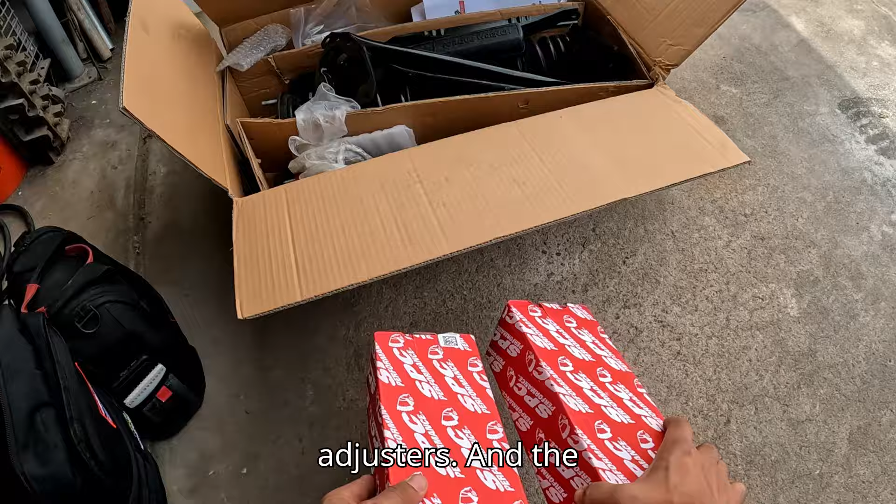Alright guys, I got the front adjusted. There might be one final adjustment to go up a little more, but I'm going small little bits at a time. We got the SPC camber adjusters, and the rear are coilovers.

So first things first, let's get these lug nuts broke loose before we jack it up, and then we'll put it on jack stands. Alright, just gonna loosen these up and then finish jacking it up. Then we can get started.

Alright, so we gotta pull all this shit out, and the reason why is so that we can pull the inner panels inwards so that we can expose the bolts to the inside of the struts. So I'm just gonna take this shit out. Take this stuff out.

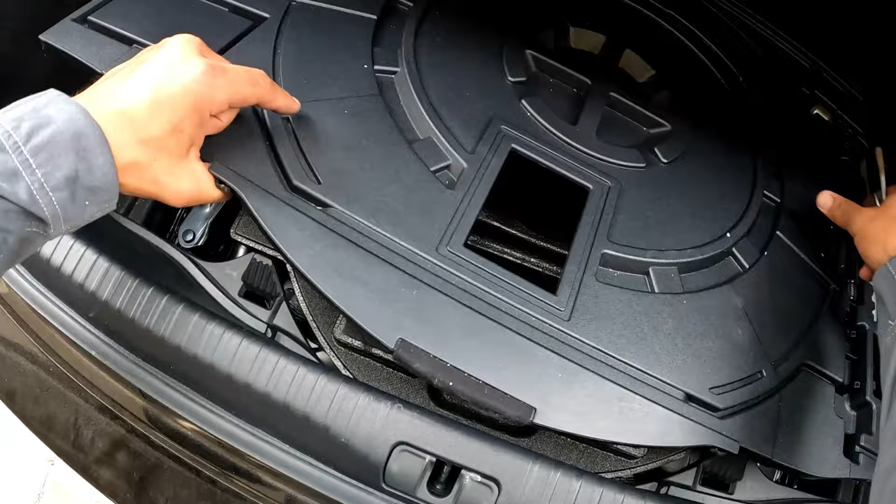So I'll show you guys how I use it. So use a little Lexus tool, and then you use the back of another one for the leverage. See that? Of course it would fall in here. Maybe I should take this whole thing out, because I'm going to drop more shit in there.

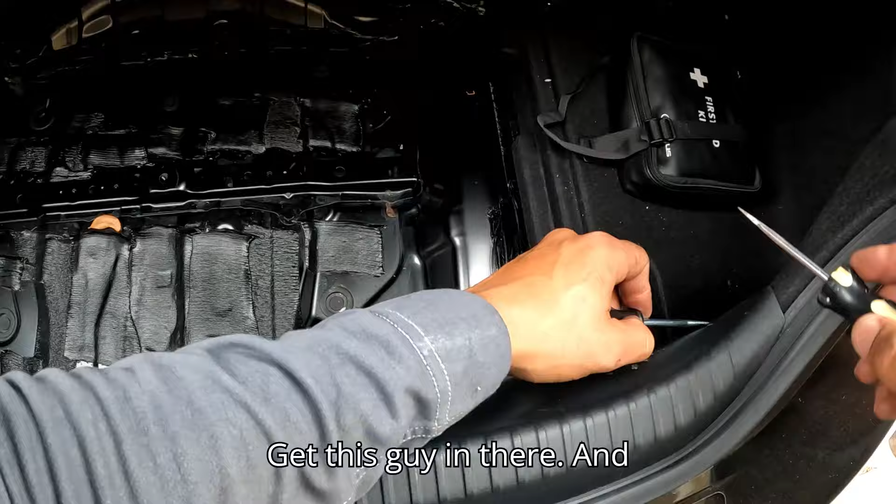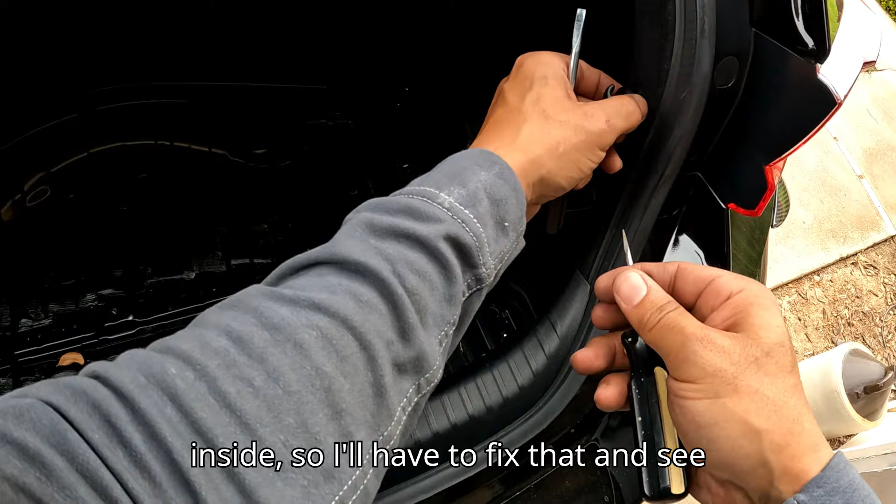So, same thing again. Get this guy in there, and then use this for leverage. There we go. This one spins out. Come on. The back of this feels like it's gonna fall off inside, so I'll have to fix that and see what it is. Yeah, look at that. Alright, this you're gonna pull upwards. Yes.

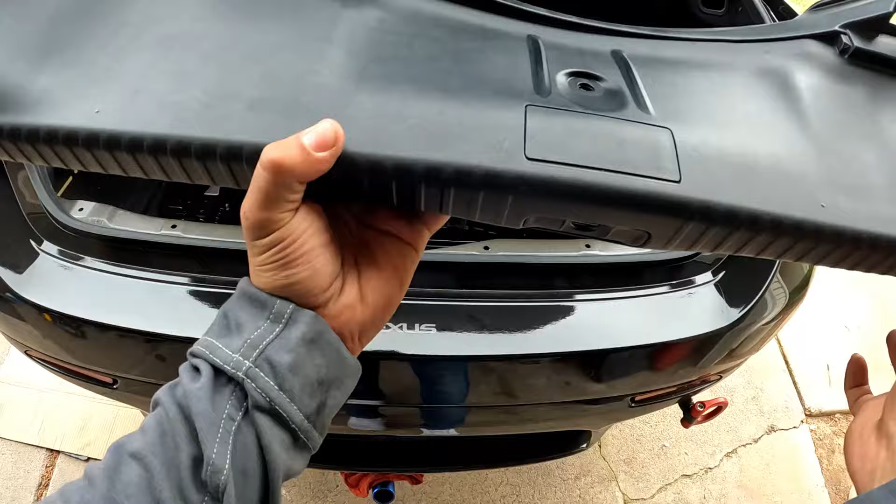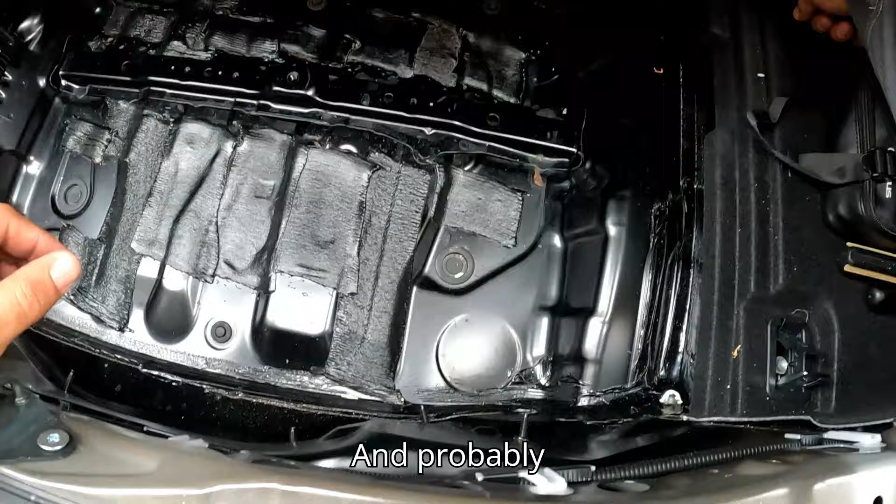Alright, let's see, what else do we have? Looks like there's a bolt right here. Yep. Looks like a 10mm. Another 10mm. Alright, so let's take those off. And probably here too. Yep, 4 bolts.

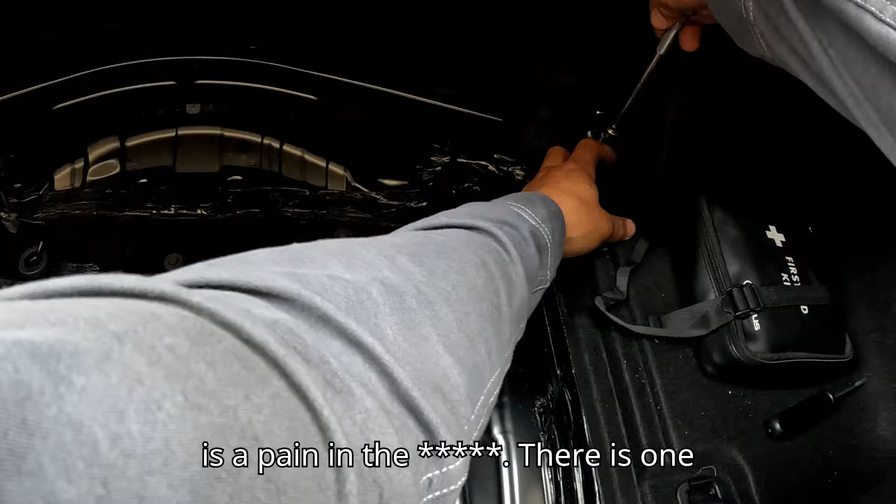So even though recording is a pain in the ass, there is one benefit to it. If I forget how something goes back, I can always look at the video. Alright, these I'm just going to leave here, and I'm going to leave them in the position they came out.

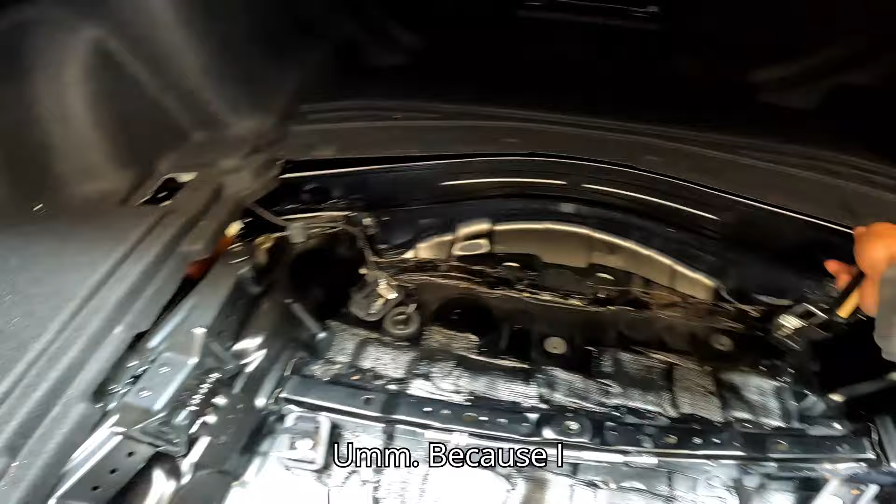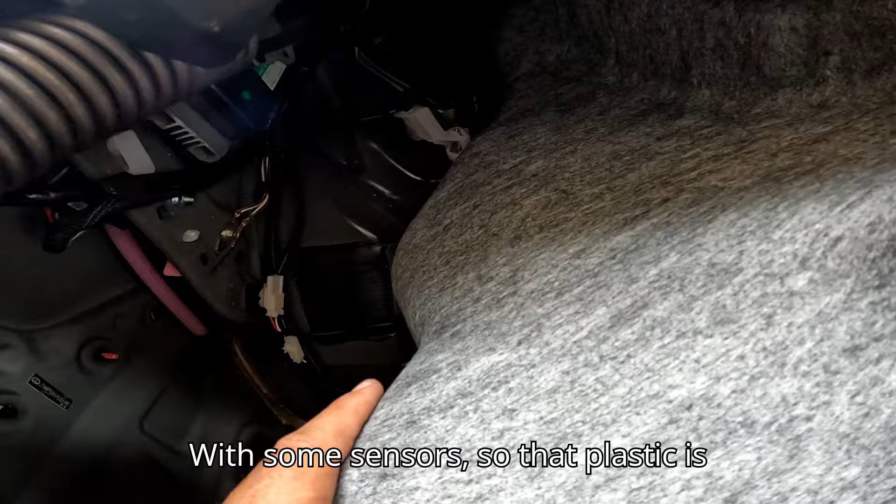So, alright, so I did take these off because I was pulling this side in and it was kind of in the way, so I just kind of want to do this. Close this guy. Do this, and then now that I have this top side loose, I can pull this out. And there's our shock, back there with some sensors. So that plastic's gonna be a spare part, yes.

All right, so now that the inner liner is exposed and we can get to the top of this, we're gonna need a 10mm to remove this. This is not the brake line, this is the ABS, I believe. So we're removing that. We're gonna need a 7/8 for that big bolt on the back, and you're gonna need a wrench for that. It's really hard to fit a socket because everything's in the way. It might actually be easier to remove that after you get the springs out.

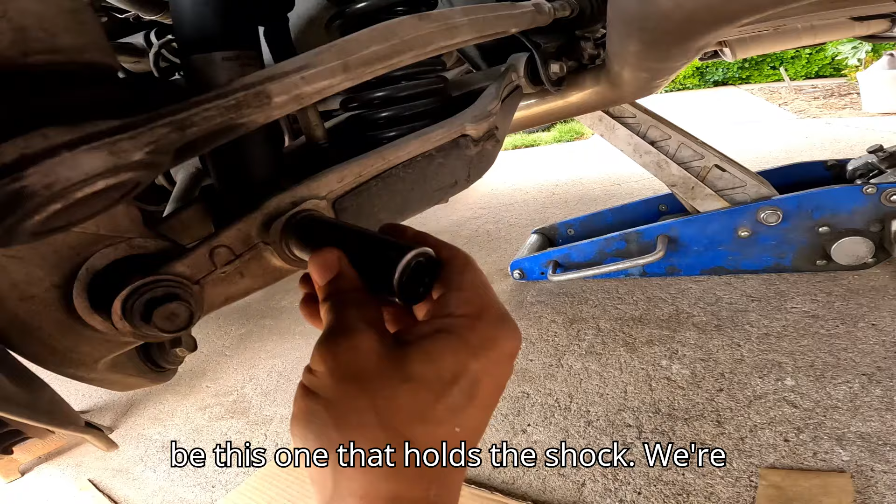So right now we have a 3/4 for these bottom bolts. So it's going to be this one that holds the shock. We're going to loosen that one but not take it off, and we're removing this bottom one as well. We're going to put a jack underneath. We're removing the sway link. That is going to be a 14 on the bottom right here, and that'll let us pop it off.

Jack on the bottom to hold it from springing out when we take the bolts off, and then we'll lower the jack, get the spring out. The shock will be left dangling, and then we'll remove that from the top, and we'll do this last once we have more room to work in there. So now I'm gonna mount the camera back on me so I can use my hands.

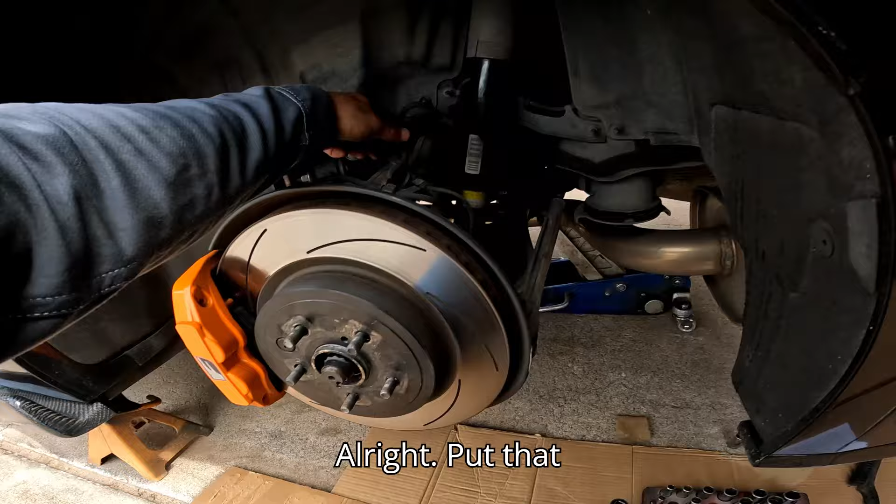All right, put that there. So ABS is loose. Now we're gonna do the link. Fucking working one-handed. Lefty. All right, time for a jack. All right, there's the shock bolt.

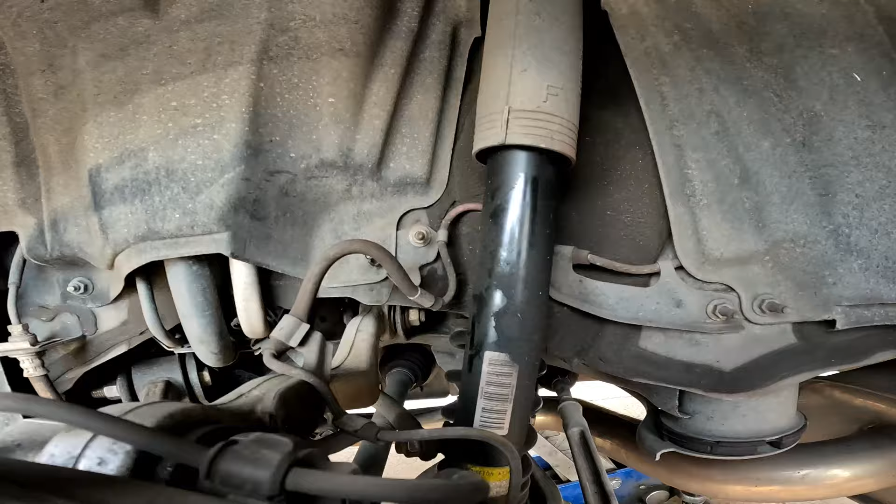Alright, I lied. It's not a 7/8 for that back one, so let's figure that out. I'll loosen that back bolt. Before I do that, I'm just gonna go ahead and lower this, see if I can get the spring out. Something's catching. What is it? It's not that. So shock's loose.

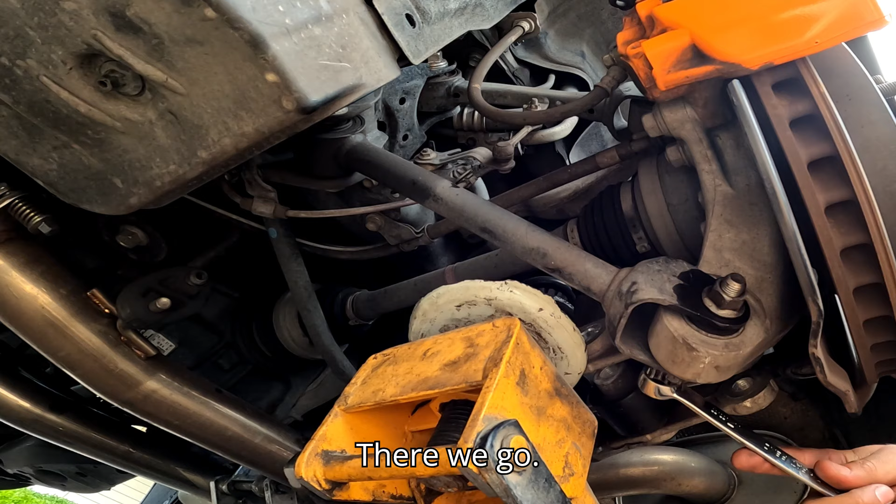Oh, I see. It's this piece, motherfucker. Come on. Just get in there. Oh, I got it. There we go. So stupid.

So I can't get the lower control arm off without taking this bolt because it's in the way. So this link right here is just hitting the bolt, so bolt needs to come off. And if I remember correctly, when I did the lowering springs, this was a royal pain to line up. So looking forward to that. It's gonna be so fun. All right, come on. Alright, so I'm going to push that out and then we'll lower this and get the spring out.

Just in case you guys are wondering, 1.5 years. That's about how much you get from these shocks when you use the lowering springs. Both the rear ones are leaking. The fronts are still okay, but the rears are shot.

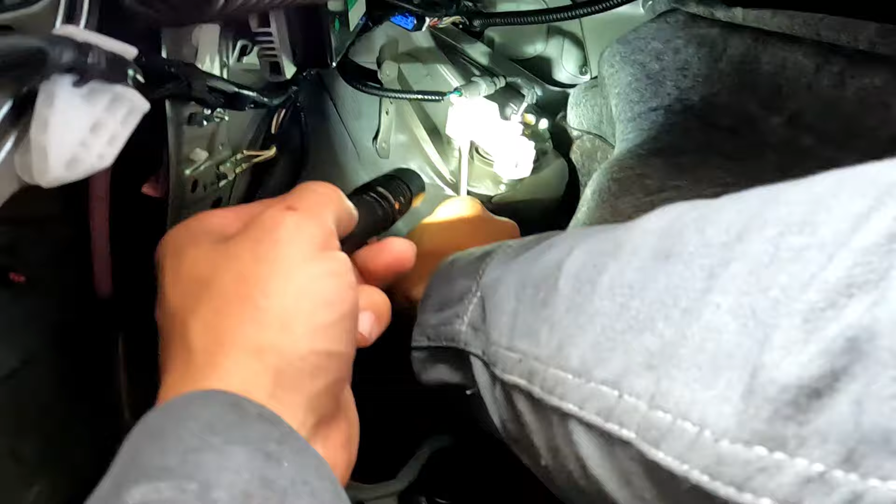Alright, there we go. There we go. Got this off. I'm just gonna take this plastic off completely. I don't want it back here. Spare part.

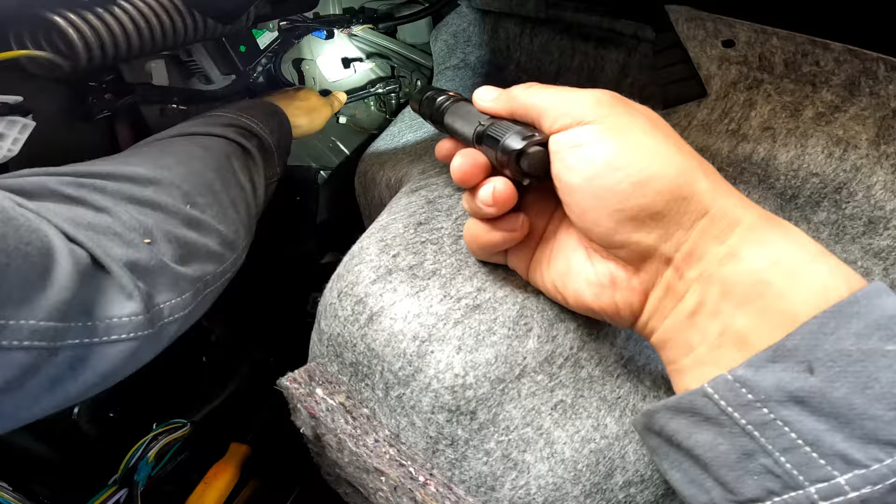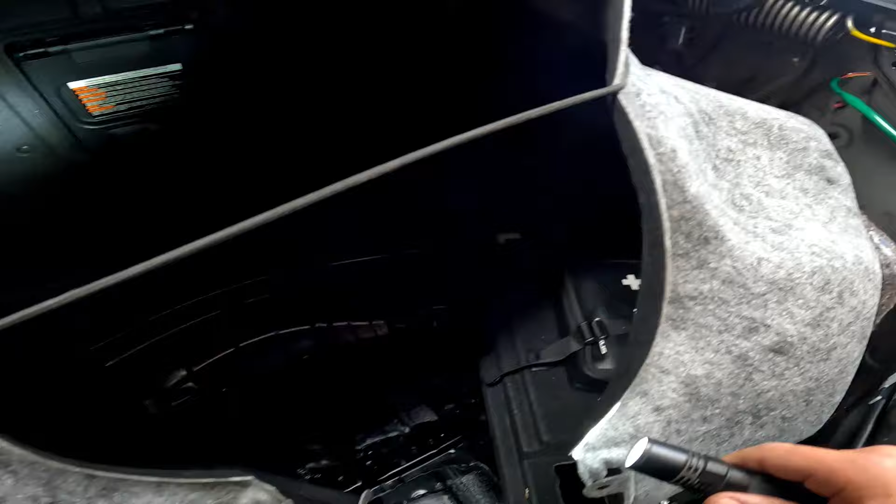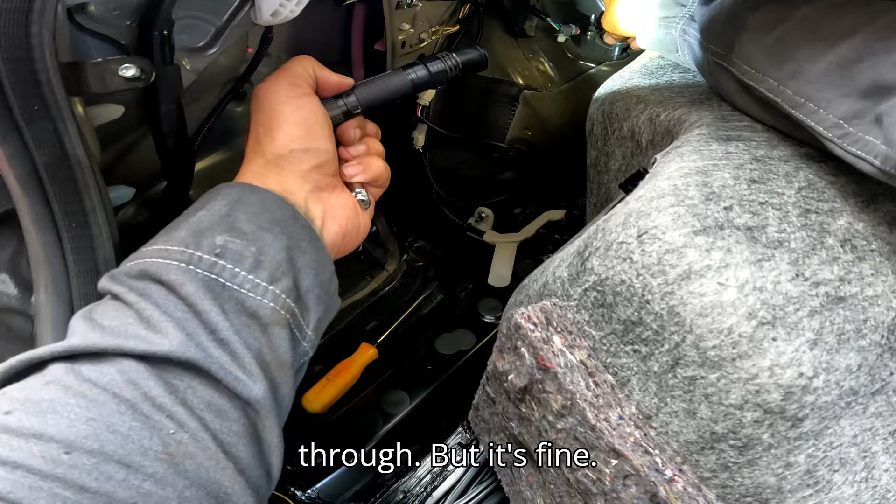Alright, so it looks like the top of the strut is a 14, just tight as hell. Jesus. One off. Yeah. Two. And what I did was I bungeed these together. There we go. Everything is loose down at the bottom, so the last bolt here is probably going to have tension all the way through, but it's fine. These shocks are trash anyway.

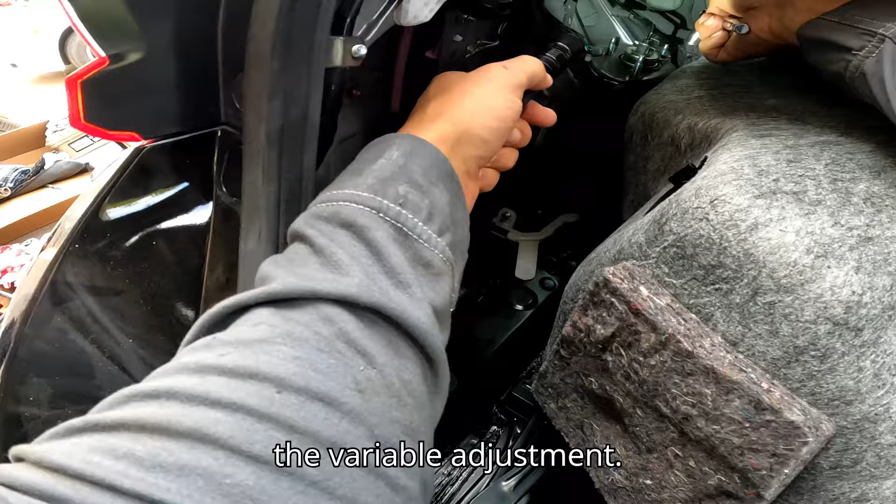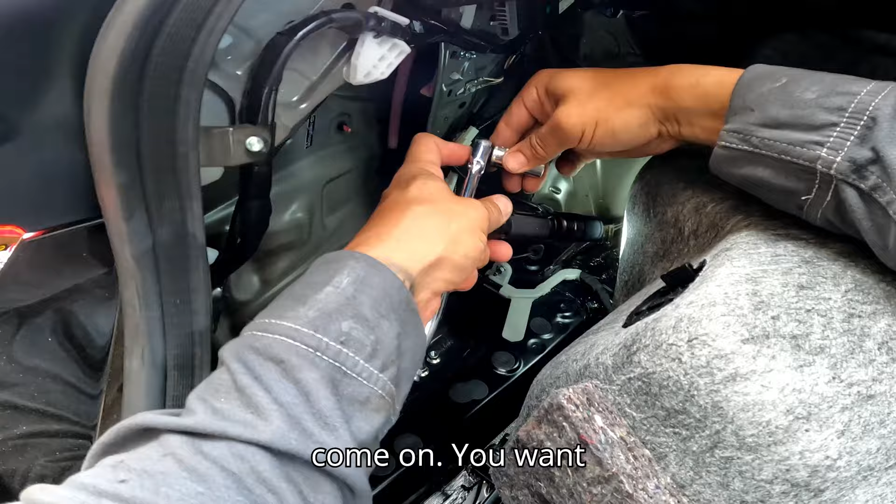If you guys are wondering if I like the ride of the Swift springs, I really did. It rode nice. It's a little too plush, even with the variable adjustment. But really what I'm looking for now is I'm chasing the perfect fitment. And I think you will eventually reach that point where you want your, oh my God, come on. You want your wheels to sit perfect, but also have that happy medium where your ride is not rubbing, but ooh, there we go.

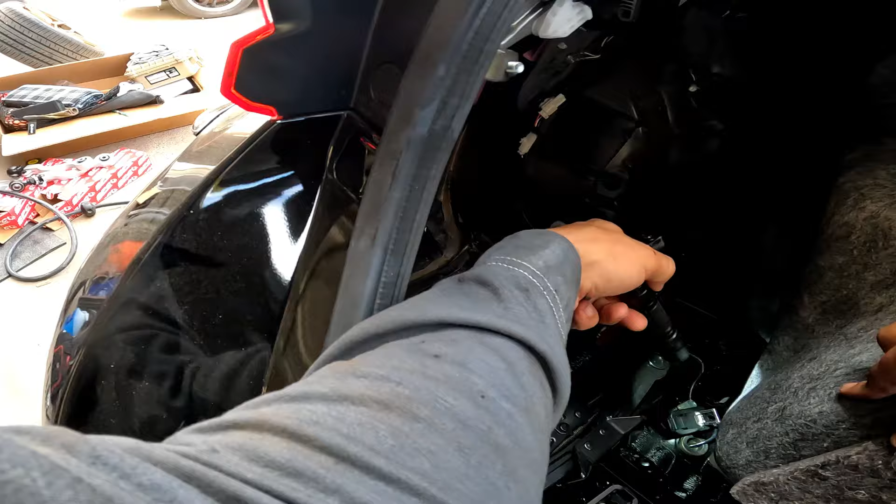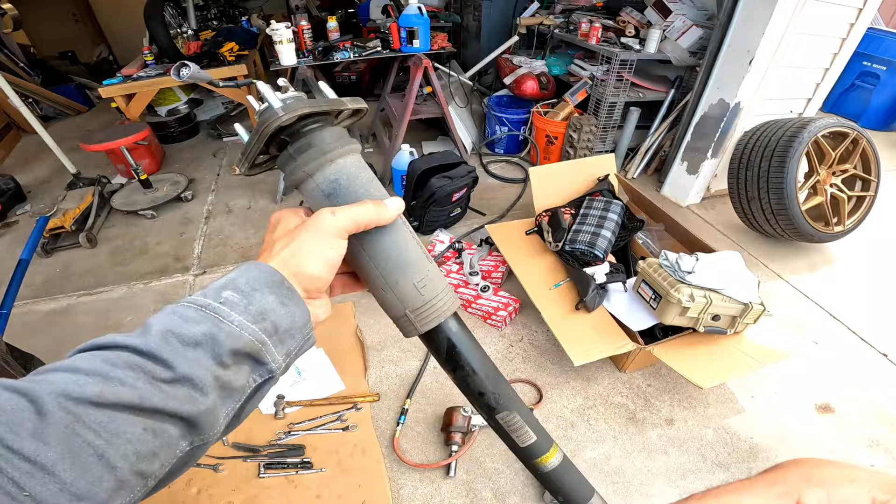These are about to drop. Yep, there it goes. Come on, where are you? Found you. Okay. All right. Look at that. It's the first time I see one of these out like that. The rears, that's a pretty long guy.

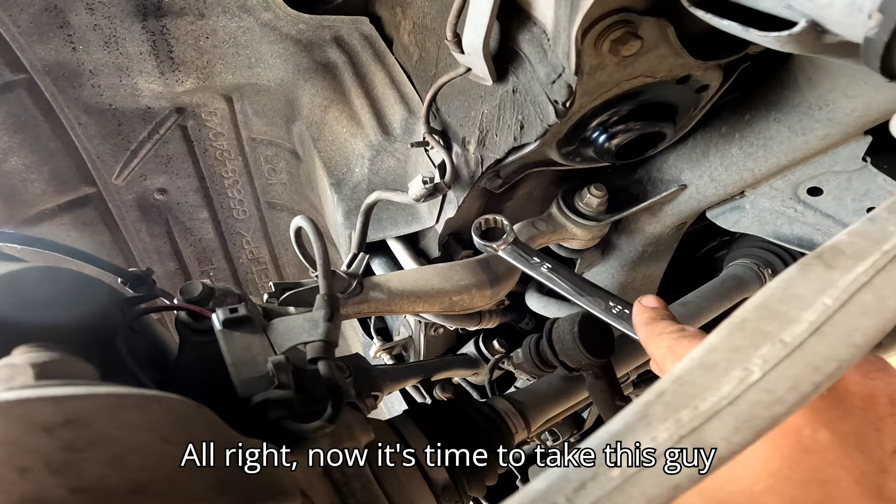Alright, now I have to deal with this bracket for the brake sensor. It's going to be in the way of the struts, so alright, now it's time to take this guy off. So we're going to use a 3/4 on this bolt here. And let's see. This one's kind of hard to get to too, so I had to use the 2-wrench method for leverage. All right, one guy, and now we're gonna do this bolt. Yes. All right, that is a 7/8.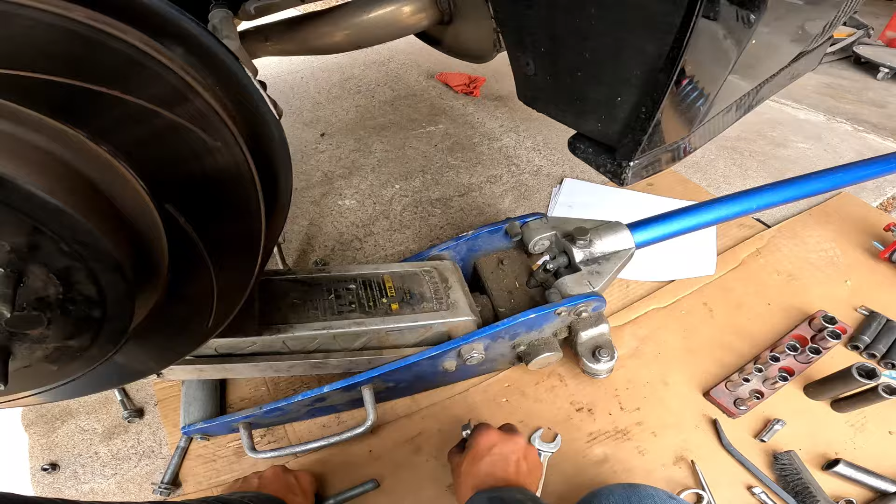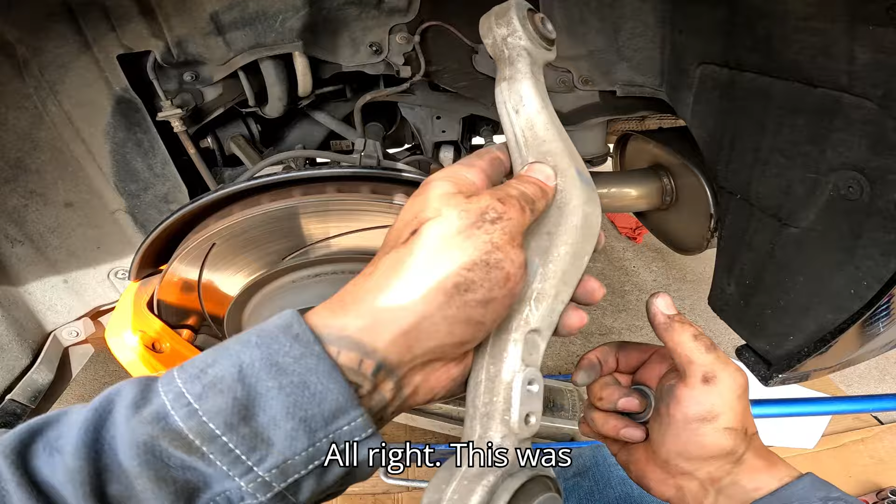There we go. There's a washer on there. Yeah, we got it. Alright, these go together. And now we are going to pry this off. Okay, so it's off. Take this washer. Alright, this was the hardest part, to be honest. I'm gonna leave this washer here.

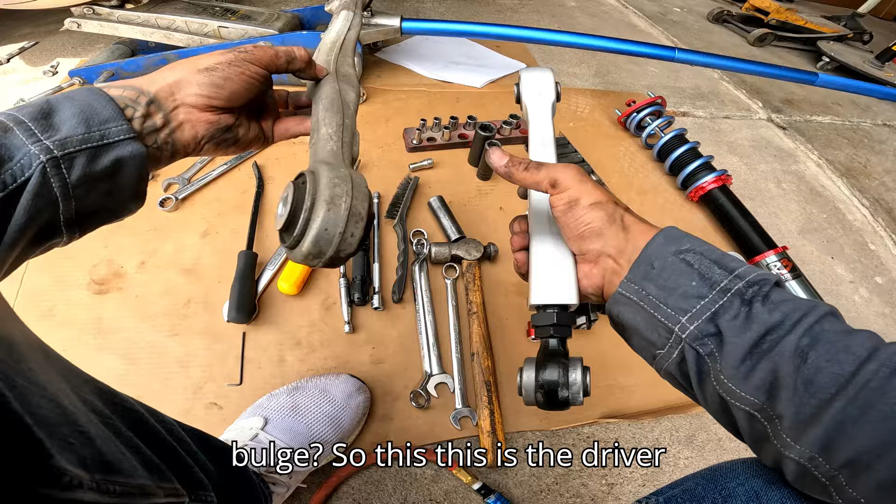Okay, as far as these go, they both look the same, to be honest. So see how this has a bulge? So this is the driver's side, left side. These two are identical, so there is no right or left on these. And what you would do, if I had to guess, is I think you just have to switch this to the other side for one side or the other.

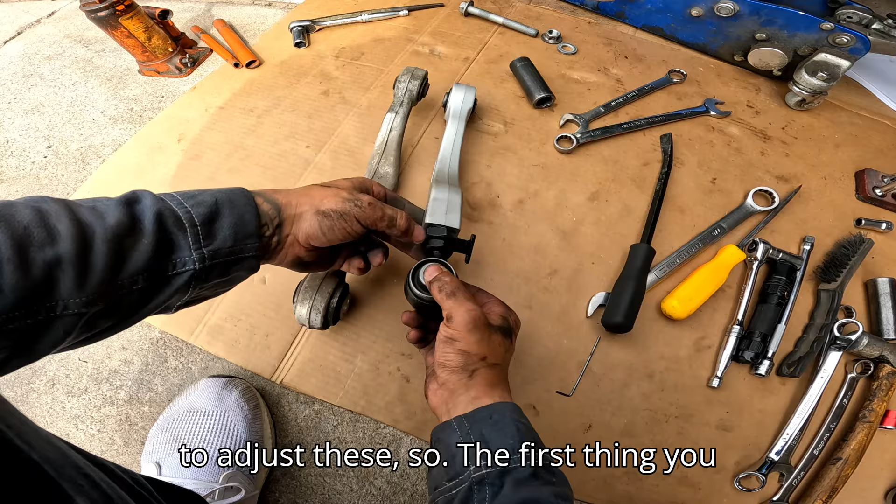Alright, I'm going to show you guys something. Alright, I'm going to show you guys how to adjust these. So the first thing you want to do is this nut right here. You got to get it all the way out to the outside. This is what they call the small jam nut, and the hex adjuster is this large one here. So what the instructions say is that both sections should be equal length.

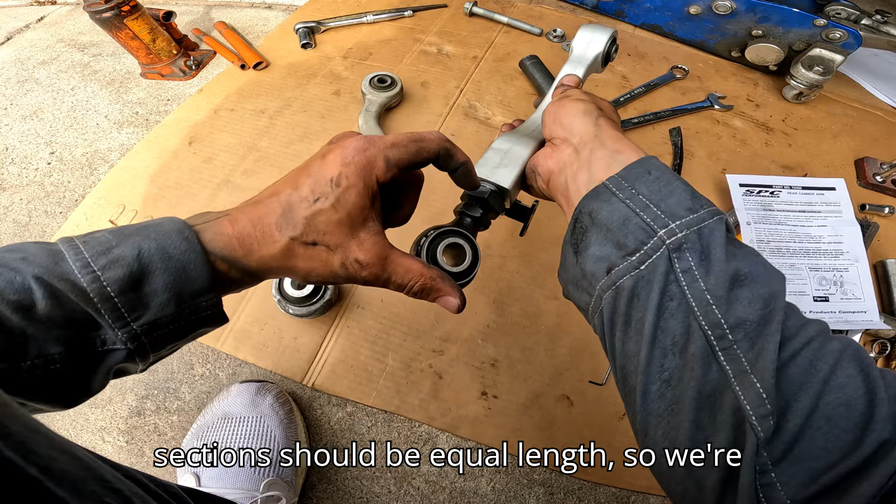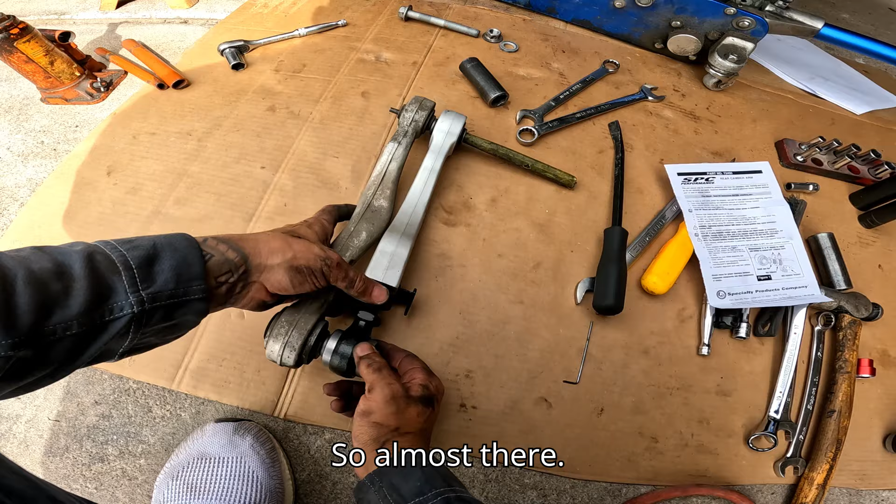So we're going to make this match this side, and if we want to get real picky, we can align them here perfect, right? And so the camber is just slightly off. I think I'm at like -1.2 camber. Oh, this is reverse thread, by the way. So we're gonna make the adjustment by moving both so that both are equal length right here. So this is reverse, this is not. So almost there. Okay, just a little bit more. I think that's pretty spot on, but just to make sure.

You know what I could do? It's this right here. There we go. Okay. That. Look at that. We're good. Okay. So, are these equal length? They're pretty close, I would say. They don't have to be perfect, but I think this needs to be out. And okay, that's pretty damn close.

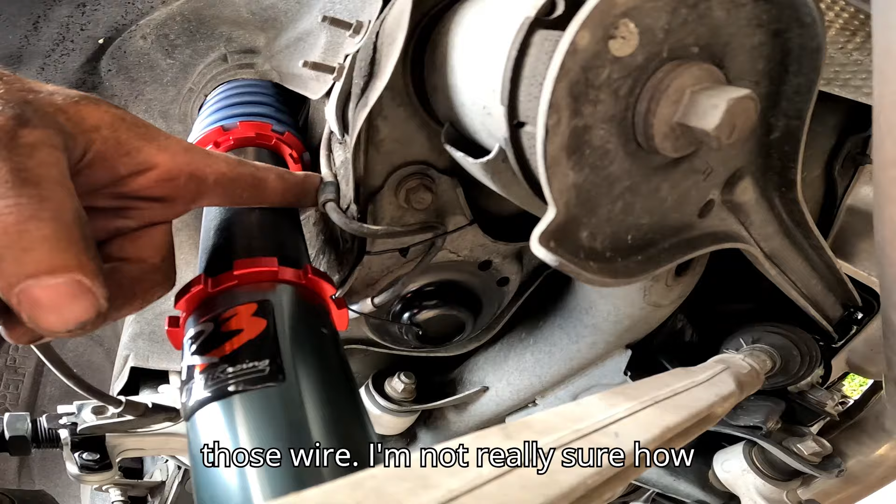Alright, I'm holding the strut up with the jack so that I can go thread it up top. I put a couple tie straps here for this wire. I'm not really sure how happy I am with that, so I might end up buying a little special bracket and self-tapping it in there. Something like maybe even a hose clamp. You can drill it in there and then tighten it so it holds it.

I don't know, just kind of thinking out loud, but I'm not happy. I don't like plastic wraps on things. They're not permanent. It's eventually going to fall off, and I don't want this wire to get frayed. But right now it's loosely in there, so there's not tension on it.

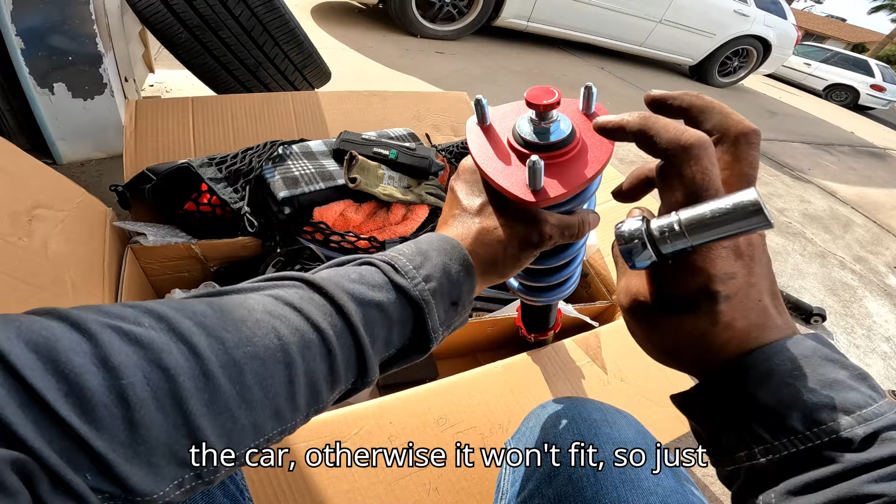All right, real quick, I want to show you guys something. There is a flatter spot here. So if you notice, these have a more round section, and this spot here is a little flatter. This part is going to go towards the body of the car, otherwise it won't fit. So just remember that. Alright, we're gonna go ahead and tighten these guys here.

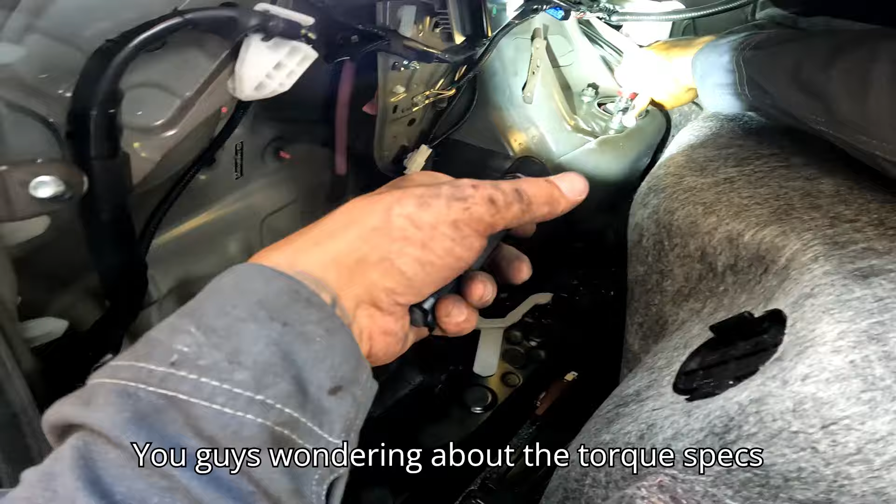You guys wondering about the torque specs for these? Balls tight.

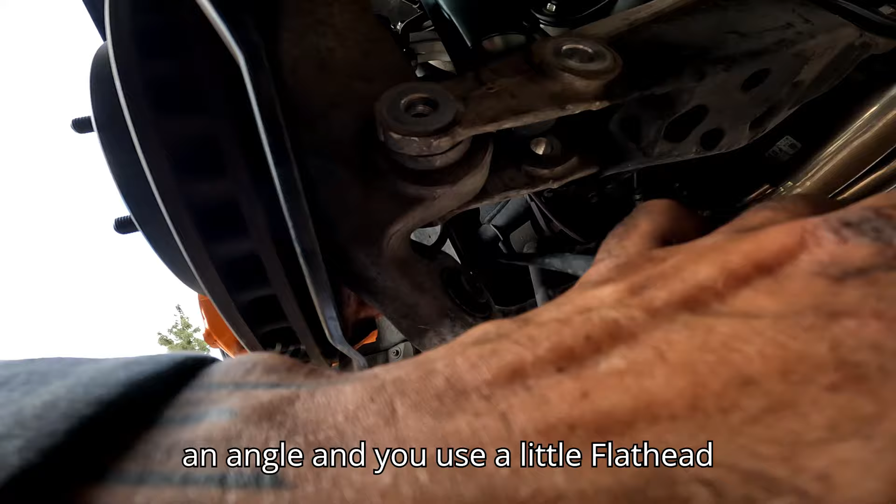Guys, putting this piece in is a pain in the ass. So you have to guide this section through this little crevice here. So you're going at an angle and you use a little flathead to kind of wedge it in place. Needless to say, I am bleeding from 5 different spots from this.

Alright guys, I officially ran out of time. It's gonna be dark in about an hour, so I'm gonna have to kind of do what I can as far as explaining things. I got the other side in. I did figure out a better way of taking things off and on, because we struggled a bit with some of the sections. Right now what I'm doing is these little tabs have to be modified to get it out of the strut's way.

So what we're going to do is cut this here and this here. But before we do that, I gotta open them up so I can get the wire out. There we go. This wire gets tucked on the back, so. And this here. Come on. There we go.

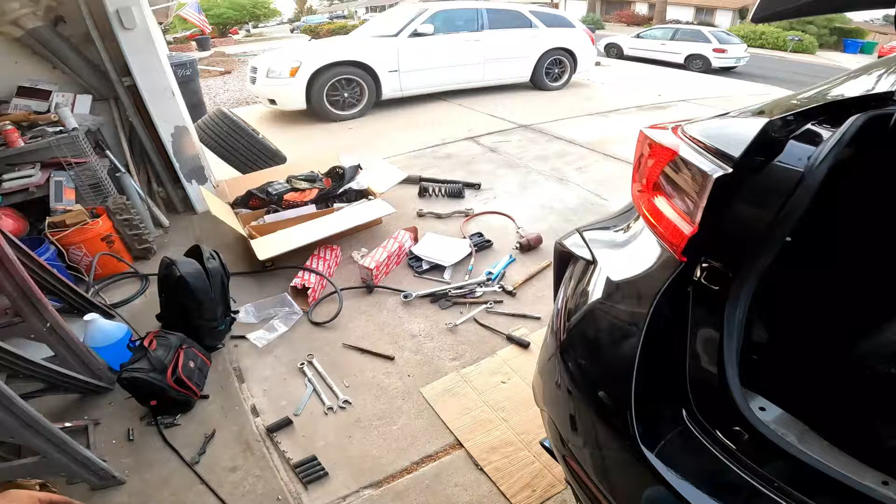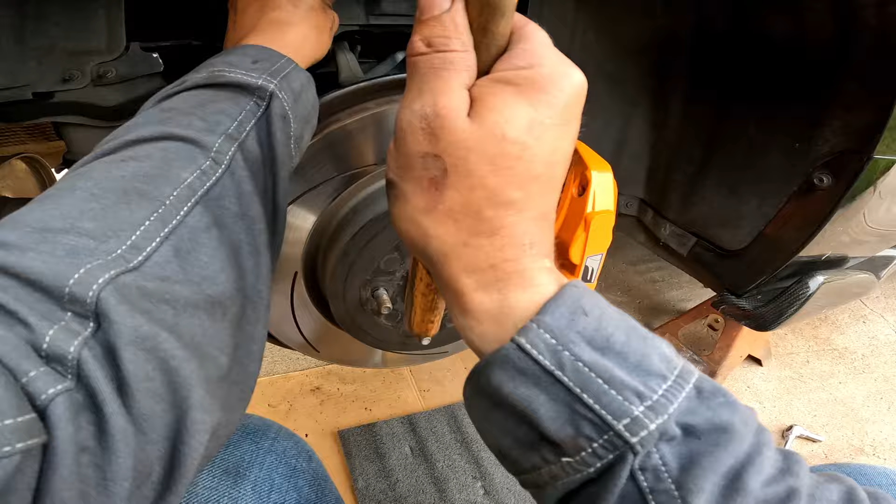And for the sake of saving time, I just made enough of an edge on it so that we can break off the tabs. There we go. Now, get the punch tool. Get that close to the body line. There we go, nice and flat. Alright, now that that's out of the way, we will take care of the rest of this later.

I already dropped the bolt underneath for the link, and let's see. The first thing that's going to come off is this link on the bottom. I'll show you guys. Alright guys, first bolt that's got to come off is this one here. That will allow this linkage to clear when you drop it. If you take everything else off first, it's going to get jammed up here, and it'll ruin your life, trust me. It's 17.

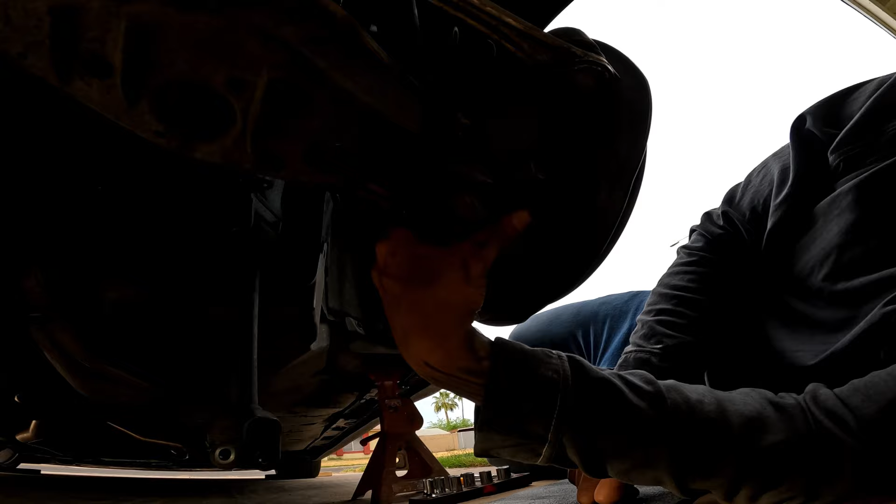That's off. Put that bolt on there so we don't lose it. Alright, now that that's out of the way, we just move it down. And then now, we do want to loosen that one, but not take it off all the way. And gonna loosen these guys. And once I get these off, I'll put a jack under here. Release some tension.

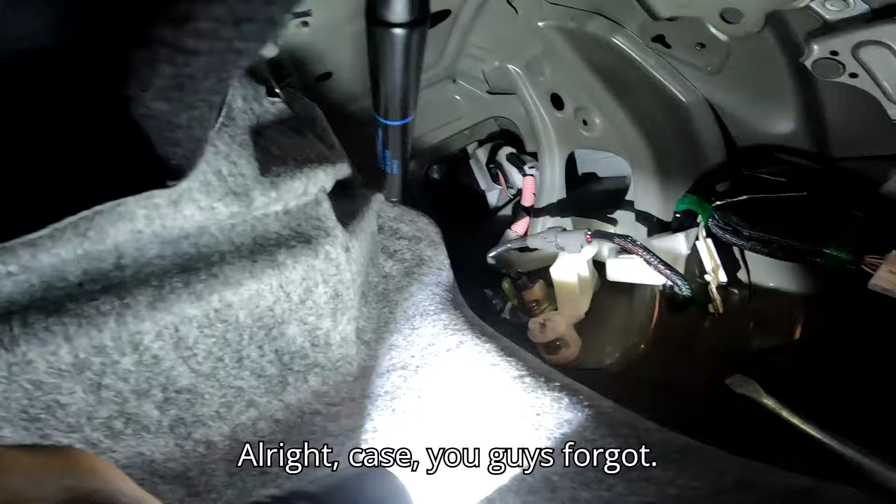Only thing holding it back is this right here. There we go. Take this off. Take the spring. All right. We are in business. Look how leaky this is. This is super gross. Alright, in case you guys forgot, we're just gonna pry this out of here. There we go. Get the back one out. Alright, both of them are out.

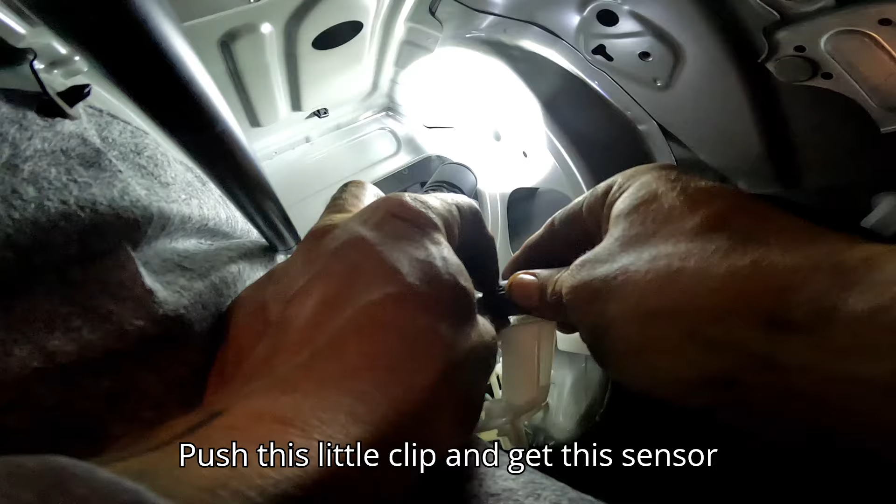Push this little clip and get this sensor out. There's a little button up top. Kind of hard to see, but it's there. Sometimes you can push it with something else. Alright, so we're gonna get these out and take the bolts off. Alright, now that we got the top of the shock loosened, we can get it completely out. Blown out piece of shit. Spare part. Look at this. That's crazy.

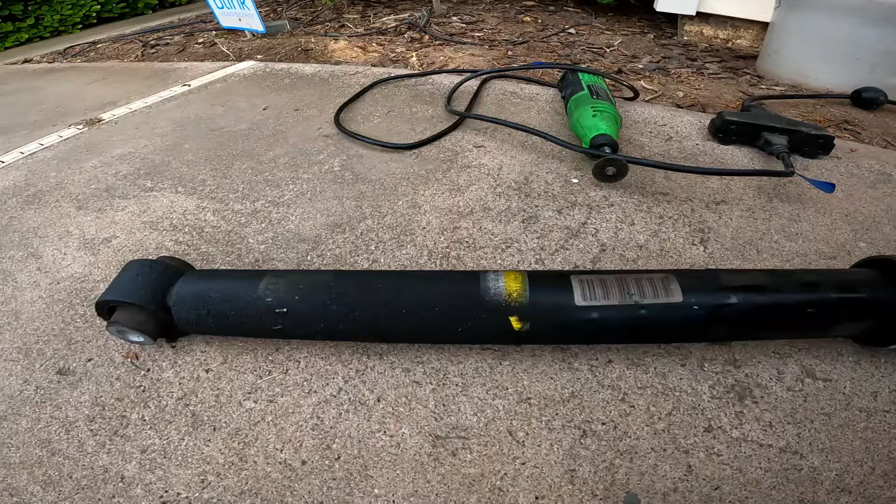Alright, what's next? Okay, next we gotta do this top camber link. So I'm gonna loosen these two bolts back there, take them off, pull this completely out. I already have that one measured out from when we did the other side. And then the only thing we're gonna be doing that's different is this little bracket needs to face the other way. So I'm gonna swap that out.

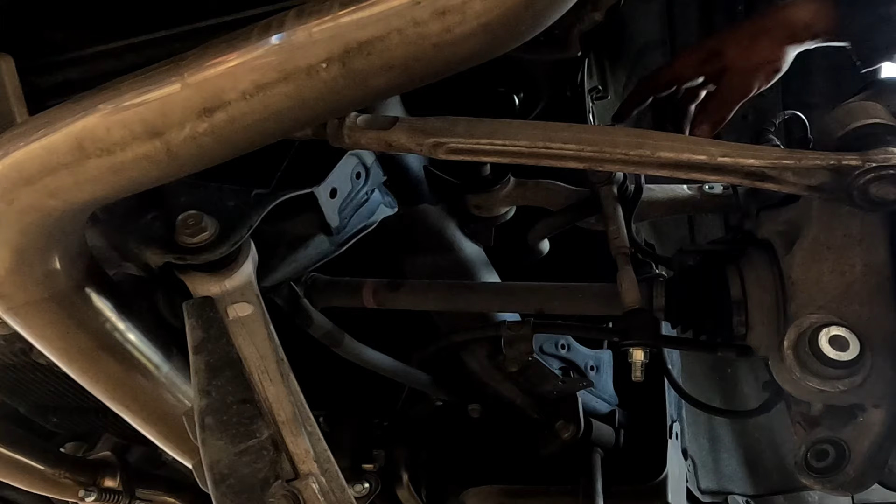Come on. There we go. It's coming out. Hey, there we go. All right. Can't forget about that washer.

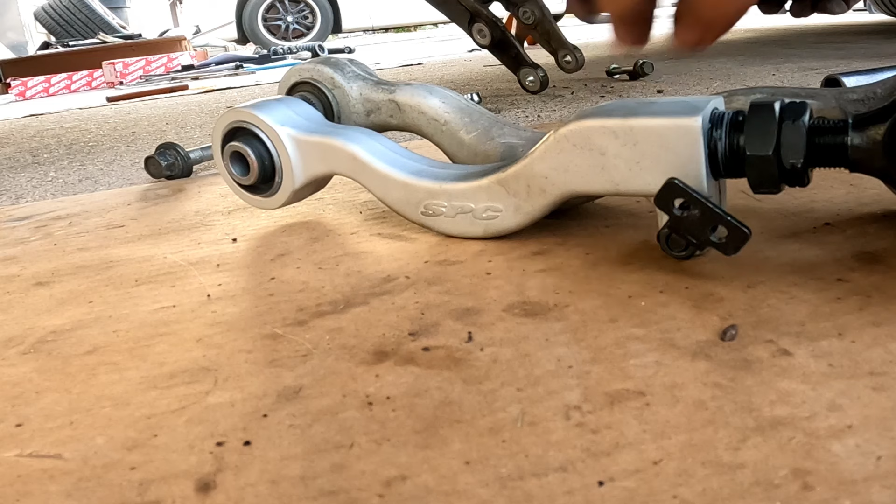We're going to double check our sizing one more time. Alright, it was off by 2 turns. So now it's good. Okay. It's gonna go there. And get this washer in there. There we go. All right. That one's in.

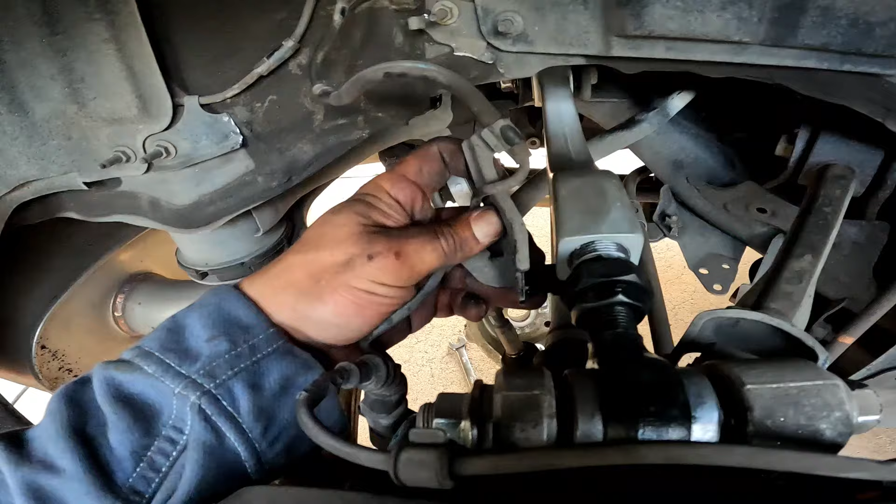All right. So now I have to tie this guy in up here. Jesus Christ, I can't. Tie this guy in and get this situated underneath and out of the way, just like the other one. And then we have to make sure that this link right here, if for some reason you forget to tie it, if you loosen up the other side, you can move both sides up and down. Just a tip for you guys.

All right, so this is the flatter part of the two sides. That's gonna go towards the body. So time to get this guy in.

It's in. Now I'm gonna face the... god damn it, this thing's loose. Gotta put a little bit of pressure with the jack so I can get the bolts on it. Alright, that's good enough. And now, if you look over here, you can see the threads on there.

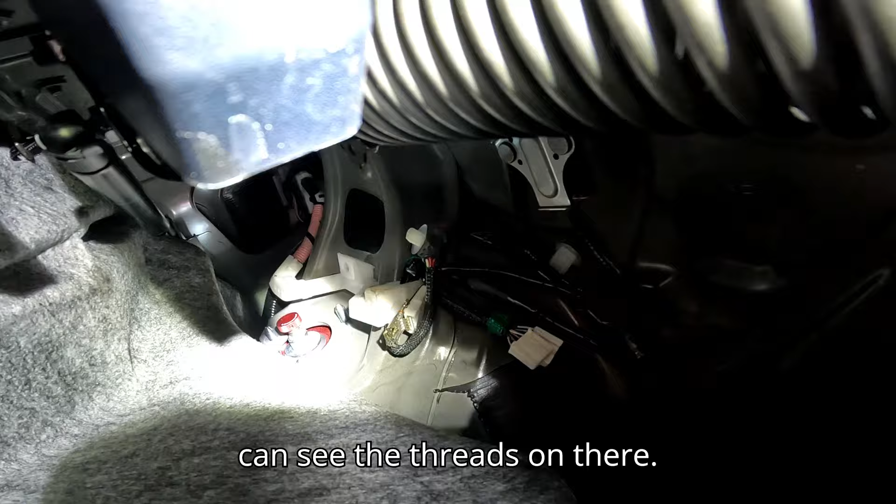So I'm gonna go ahead and put that in. Just so you guys know, I'm doing the back a little bit softer. 4, 5, 6, 7, 8, 9, 10, 11, 12. So I'm going 13 clicks out. 1, 2, 3, 4, 5, 6, 7, 8, 9, 10, 11, 12, 13.

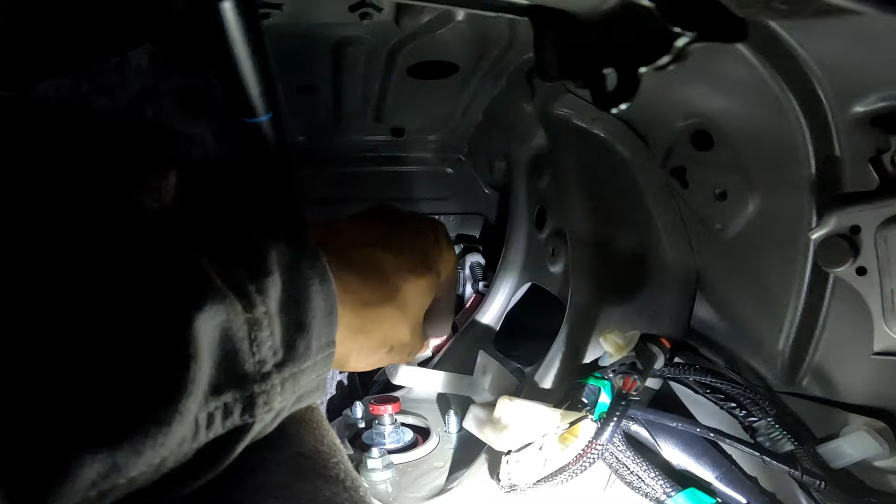So now what we're gonna do is we're gonna put this one back first and try to line up everything at once. That's the shock and the sway link. Here we go. This bolt. There's one. Gotta make sure this sway link is dropping in the right spot. There we go.

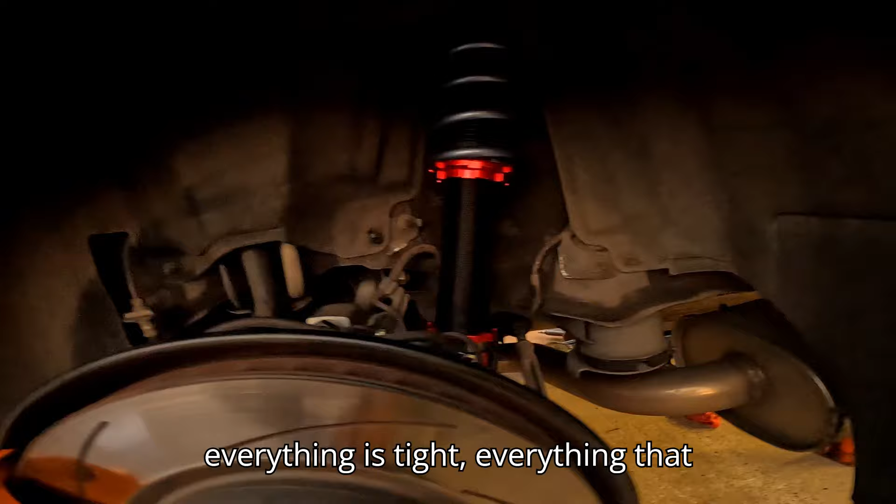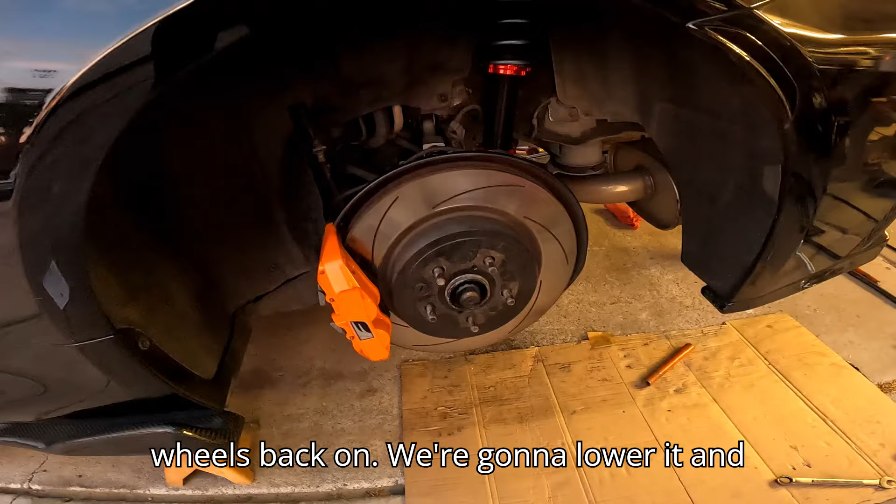But everything is in, everything is tight, everything that could potentially rub is out of the way as far as I know, according to R's instructions. This thing here, we'll see how well it works tomorrow. So I got an alignment tomorrow at 11 a.m. This is why there was a big rush on this. So what's next? We're gonna put the wheels back on, we're gonna lower it and hope that it's drivable. If it's too high, I'm gonna adjust it tomorrow. If it's too low and it's not drivable, I need to adjust it now.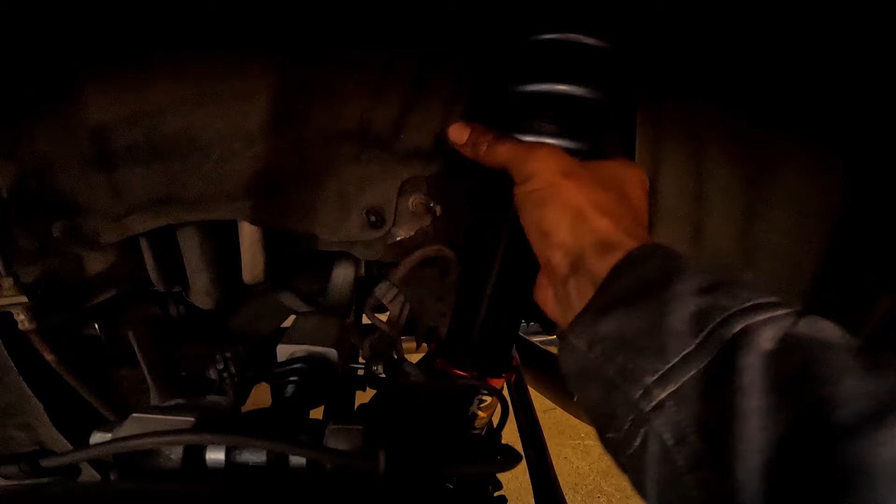The way you adjust the rears here is a little different than the front. So you don't loosen these. You loosen this bottom one because this is preloaded. And so you loosen the bottom one and you twist the top to be able to get the height that you want. And once you do that, you tighten this lock nut back in on the bottom, but you never touch the preload up top. Just remember that.

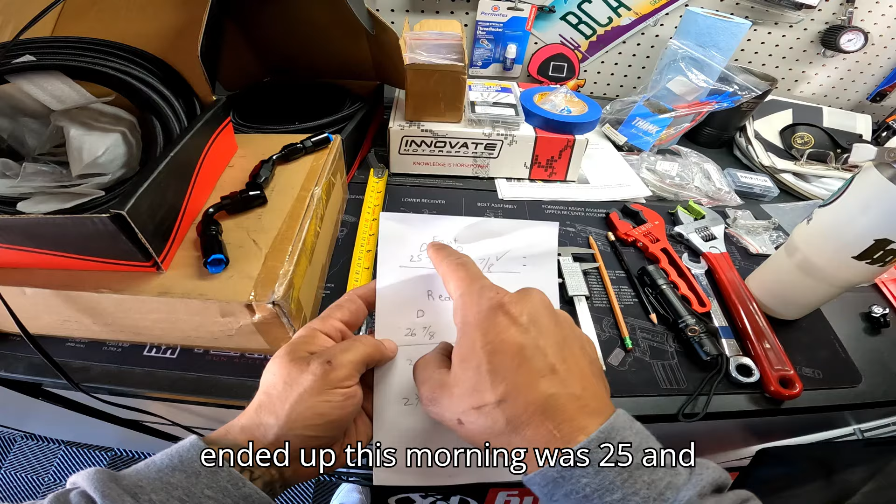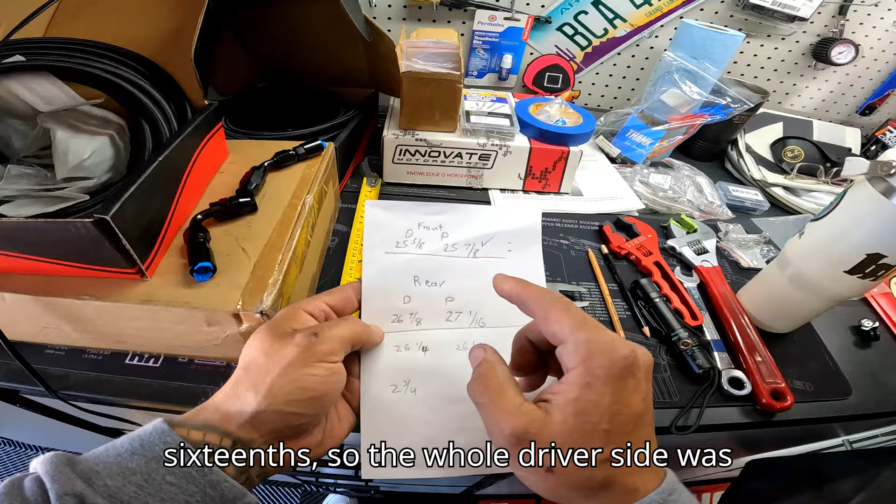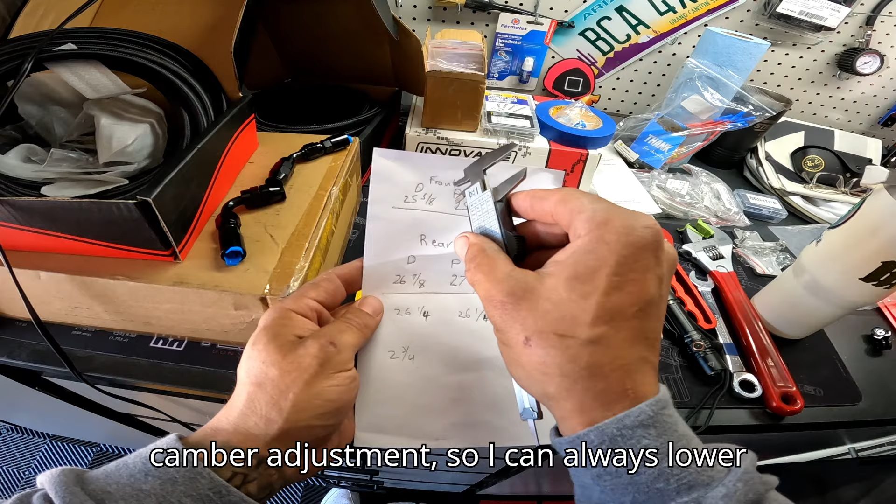So front's fixed. I may go a little bit lower on that later, but I am on a time crunch for an alignment, so I need to get the rear. The rear needs to be dialed in because it's got camber adjustment. The front does not have camber adjustment, so I can always lower the front and the alignment will still be what it is. As far as the rear, I want to go down to 26 1/4. I think that's where I'm going to be happy, just slightly higher than the front, but not even. I want my rear just a little bit higher.

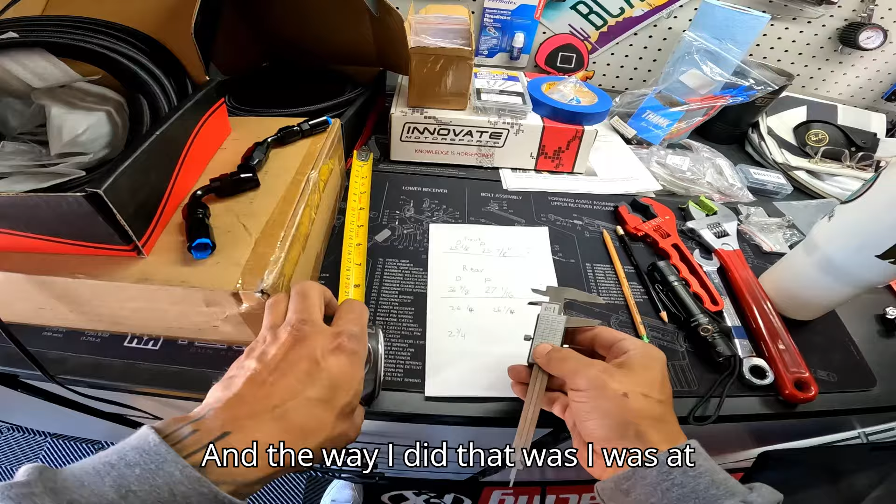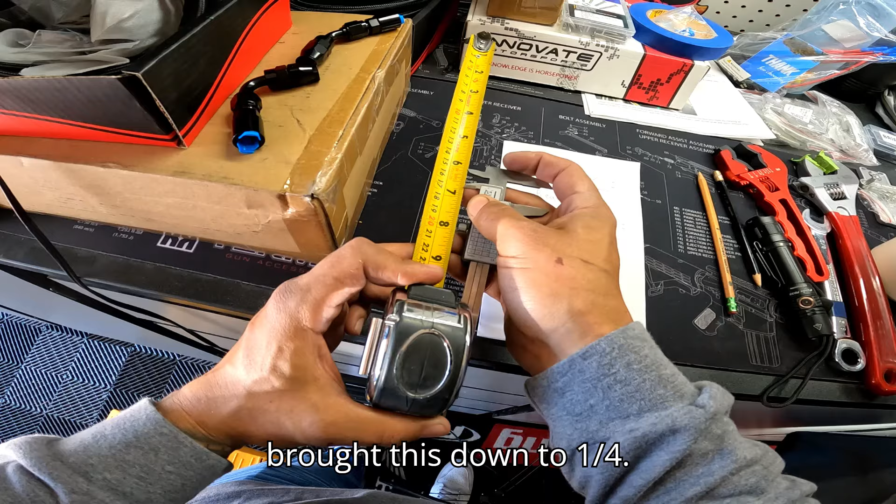So this is how much I got to drop the driver's side. And the way I did that was I was at 26 7/8. So if you measure from any 1 inch to 7/8, and I'm putting this mark on 7/8. I'm not using this because it's dead, by the way. So this is a caliper tool. And I'm trying to be at 26 1/4. So all I did was put it at 7/8, which is the original. Brought this down to 1/4, and this is how much I'm gonna lower my ring. So now that I have the measurement, let's loosen it up and get started.

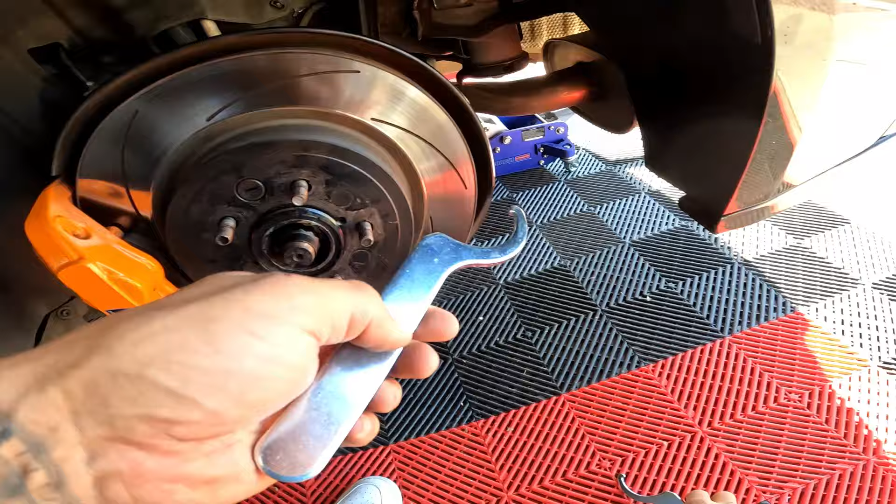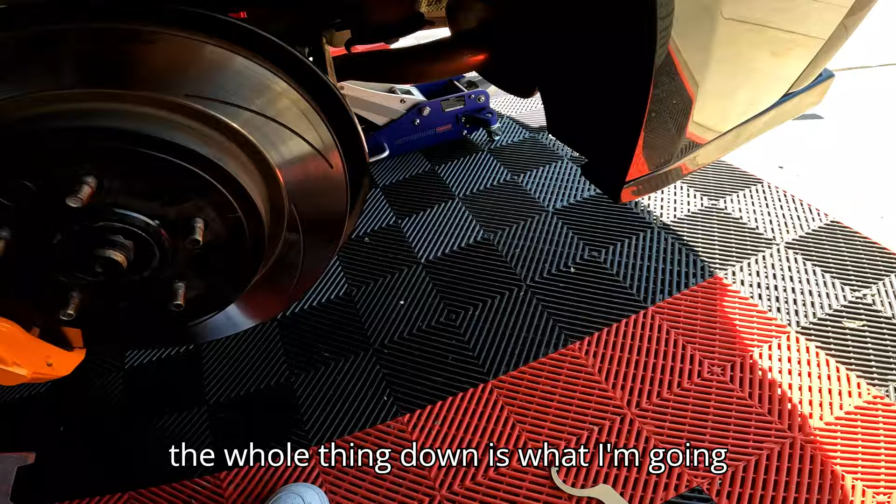I already have the tire off. This is the rear, so remember guys, the rear, we do it slightly different. We loosen this lock ring here, and I think the best way to do it is to get my measurement from here to here and then lower the whole thing down is what I'm gonna do. So I'm gonna put this guy here, still pretty far off.

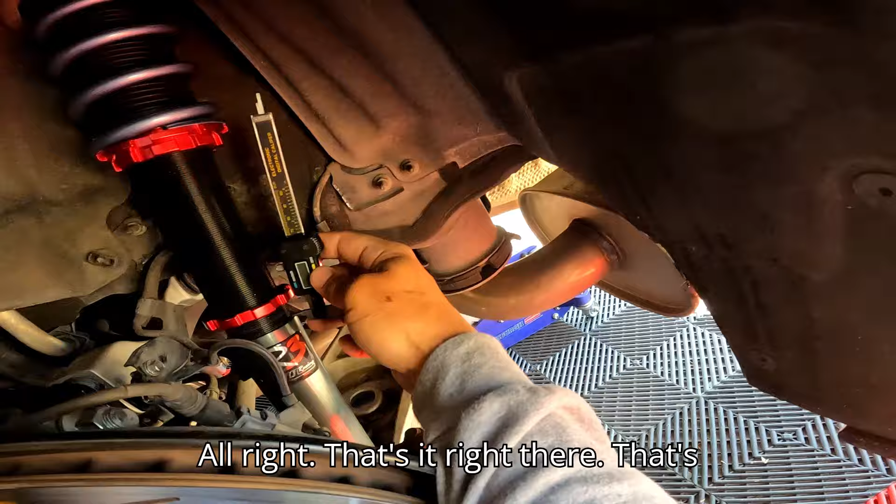All right, that's it right there. That's how much I want to lower it. So I'm not going to touch this. I'm going to lower the entire part. So this is pre-loaded, which means there's tension on this, unlike the front. The front has a helper spring that helps it play nice. And yeah, so that's that. There we go. Alright, that's nice and tight. It's not going anywhere. Time to do the other side. First, I am going to mount the tire back up.

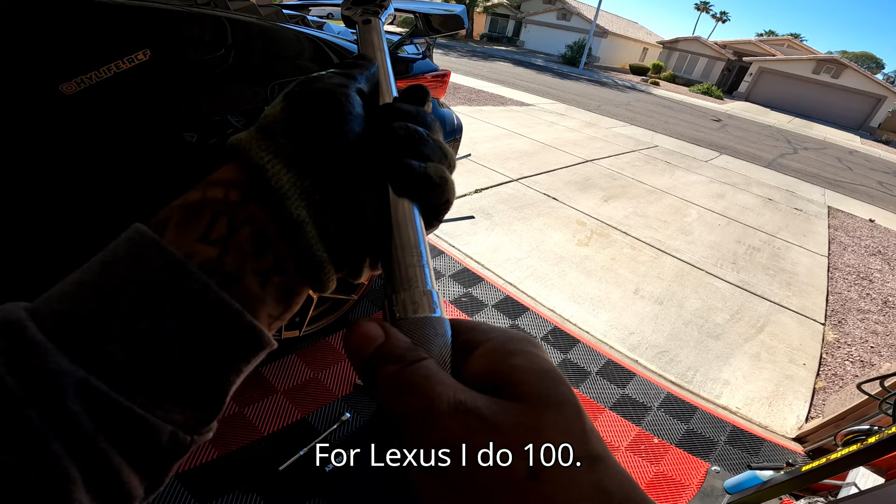My handy dandy torque wrench. So, I know a lot of people do their torque at 90 pounds. For Lexus, I do 100. And that's just because honestly 90 pounds feels like it's a little too light, and I've never had an issue with vibrations or anything like that, so this is what I stick with.